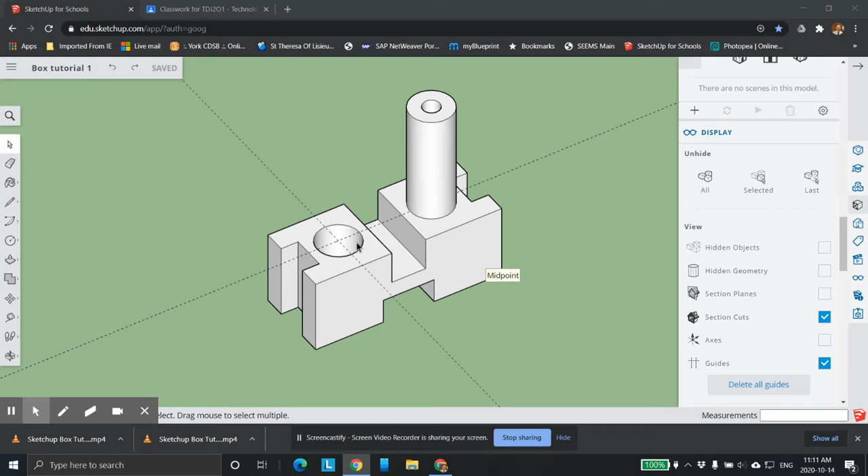This is the third video tutorial in the box tutorial series. The first one, we drew the outside and extruded. The second one, we added some features, the holes and so on, and we talked about accidentally deleting surfaces. In this video I want to come in and do some modifications, some engineering changes.

So the first thing I want to do is I'm going to fill in this hole here. Actually no, I'm not. I'm going to change the width of this tunnel. This tunnel right now is 30 millimeters wide, and I'm going to take it to 20 millimeters wide.

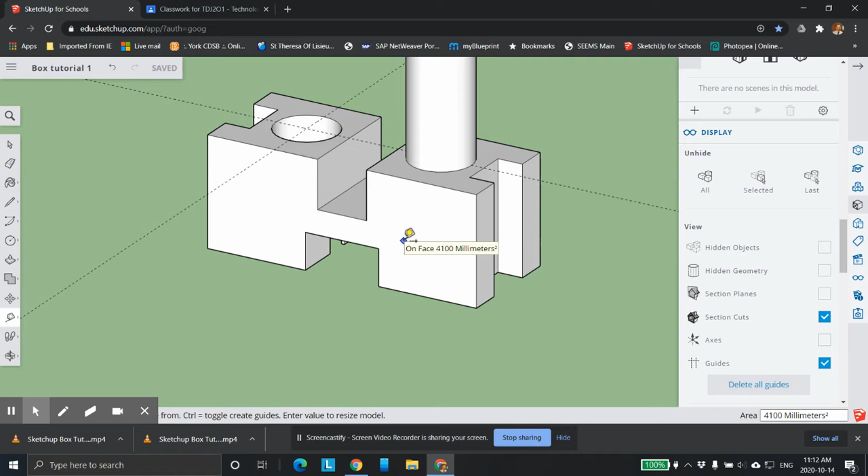The reason we're doing this is because invariably there's always changes to be made, whether it be through DV testing, design validation, something's failed and we need to make it stronger, or things are testing and they weren't working quite right. So to fill that in, we can't edit the original sketch. We can only fill it in and redo it. So that's the strategy we'll use.

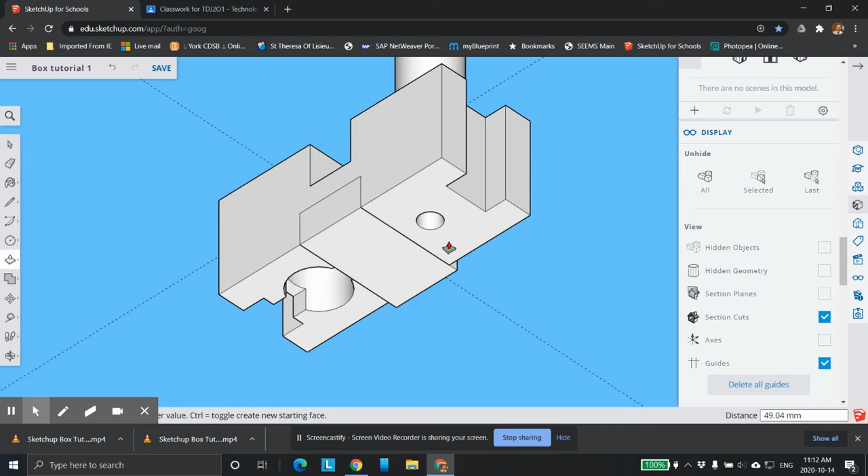We'll draw a line from here across to here. And then we can use our press pull tool like so, and we can bring it over to that edge. And now we've created a solid. Now we can come back in and delete these lines that we no longer need. This one, I'm going to leave the height the same, so I'm going to leave that, but I'm going to take this one away.

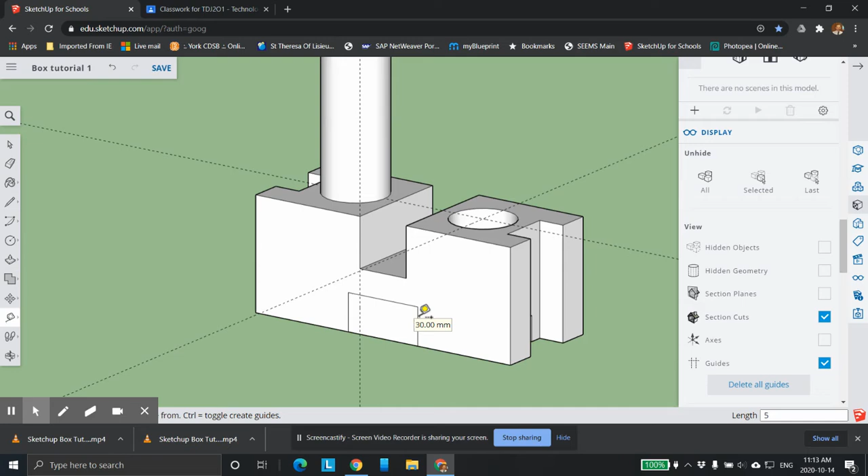Actually, no, I'm going to use that for just a second. Before we delete it, we can use it as a guide. So we can take my guides. This was 30, and we said we want to make it 20, so that's 10, so 5 in on either side. So I'm going to go in here and get 5 millimeters. And this one here, I'm going to go 5 millimeters back. Let's scroll up and make sure it's in fact sitting on that face, and it is. So now I can use my previous line as a guide.

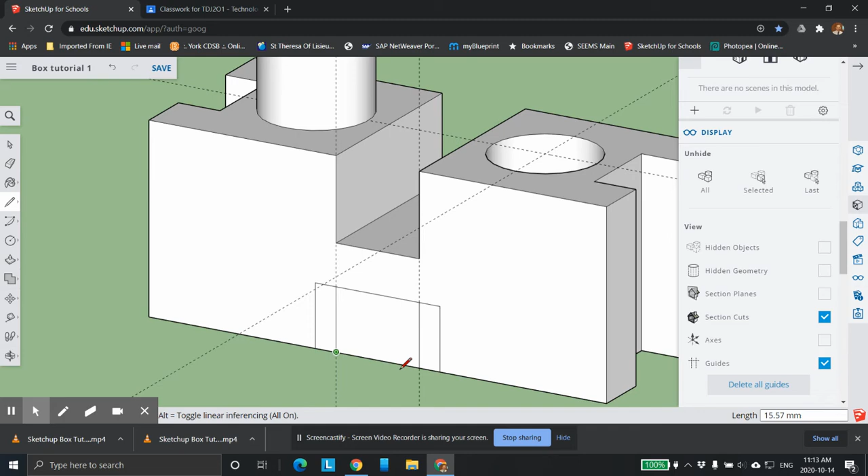So I'm going to draw from there down, and from there down, and then I'm going to close that from here back, and then I'm going to use my press pull tool here and walk it through there to that edge. Sometimes you have to carefully select it. Actually, I can probably just go here. There you go.

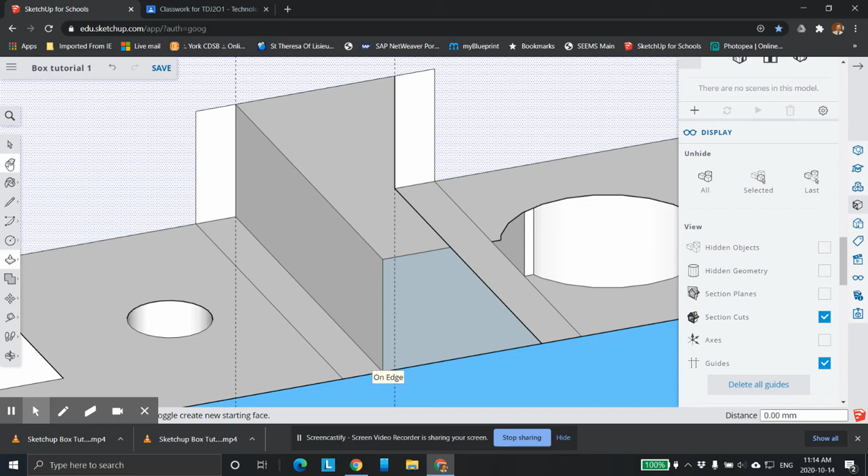Now we can delete a few things. We can delete this line here, and it'll open it up properly for us. We don't need these lines anymore because they were just our guides. I don't need the top lines either, and so on. And I can get rid of this one down here and this one across here like so, and this one. And I can do the same thing on this side over here.

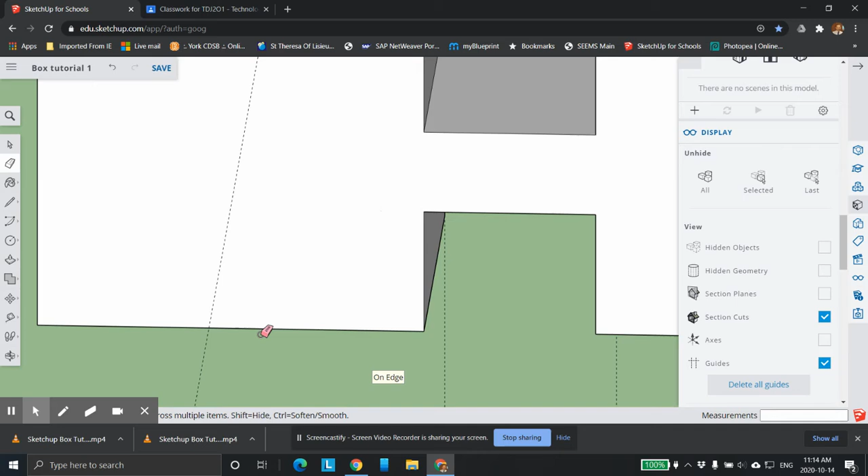Now you'll notice our channel doesn't go all the way through anymore. It ends there. So we can then finish pushing that channel back through, because we didn't want to change the channel. So I can go through with the channel to there and open it back up. And just take a quick scroll around and make sure we didn't inadvertently open up any faces.

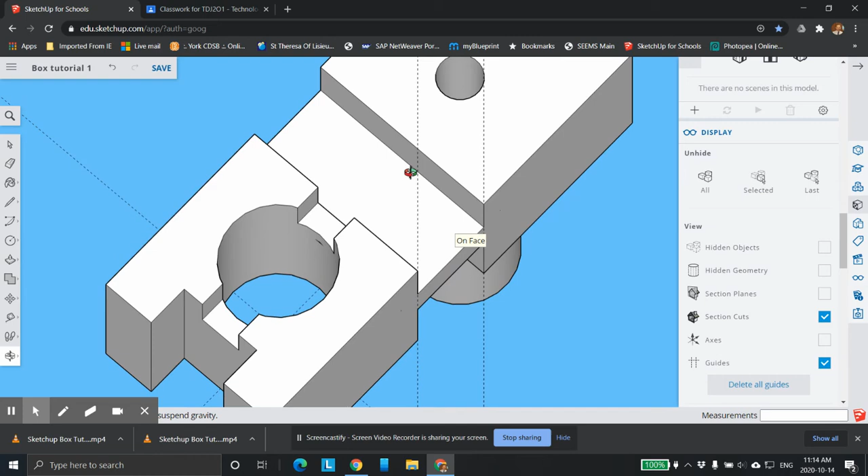We can also delete that line there. I'm pretty sure we can take that out of there and clean that up nicely. And I'm not sure what that is down there, but I can delete it too. And you can see it's nice and clean now. So we've made a modification, changed the width of that.

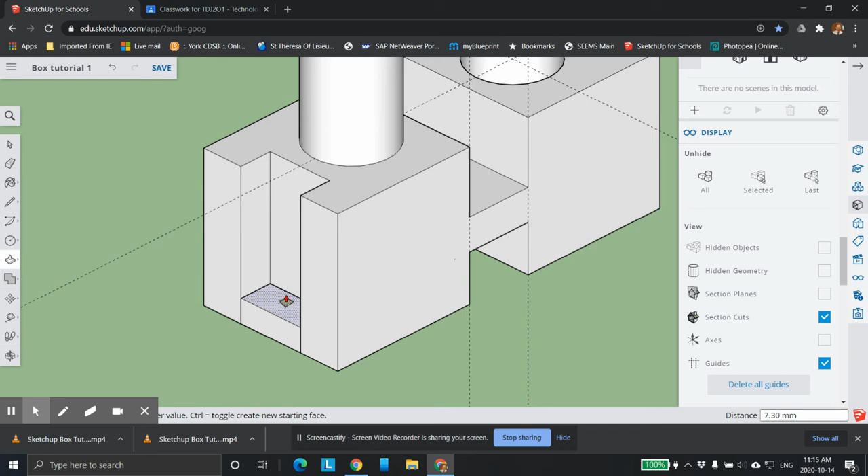We can do the same thing over here. Say, for argument's sake, we don't want that channel all the way through anymore. We find that we need it to bottom out here. We can do a couple things. We could fill it in and redrag it back down to a proper depth, or we can do this. We can just create a line, go across here like so, and then use our press pull tool and bring it up, say, 25 millimeters.

And now the channel doesn't go all the way through, and you can come in here now and delete these lines that you no longer need, and there'll be ones in the bottom as well, like so. And we've modified that.

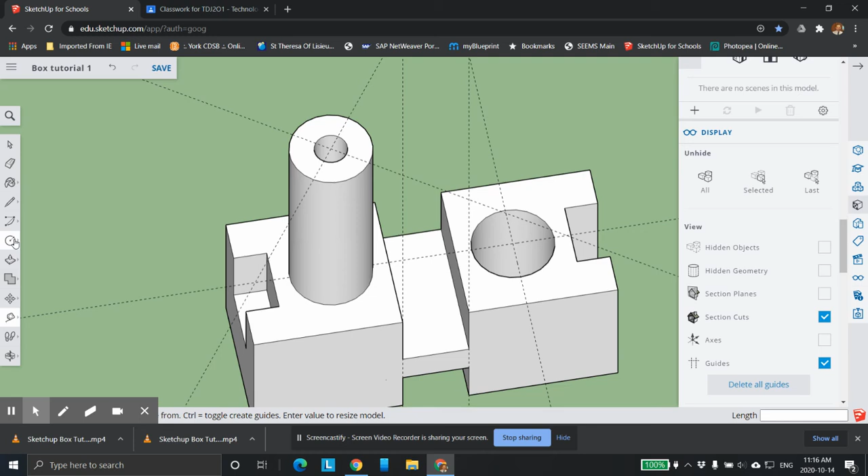Now let's say we want to change the diameter of this hole here. If we want to make it bigger, it's easy enough. We can just click there, get your center. It's not on the right surface. You can see that. So what you want to do is create some lines on your surface. So you're going to grab the proper surface, and then you can come in here and make sure we're in blue. It doesn't want to draw on that face. See if we can do it that way.

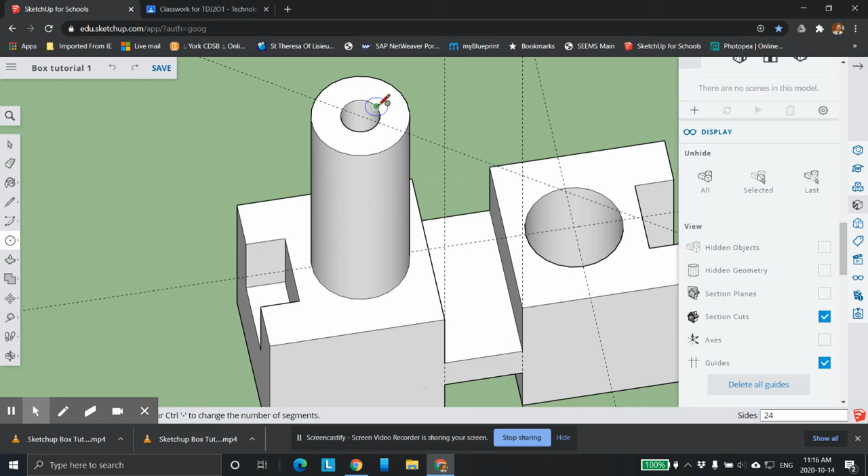Okay, so let's just fill it in. I can also delete it. The feature should be deleted all the way through. And now I can draw a larger one. So first of all, I'm going to draw a guide. I just did that because I couldn't get it to sit on the proper surface. It was giving me grief. So quicker way to do it. Now it's blue, it looks fine.

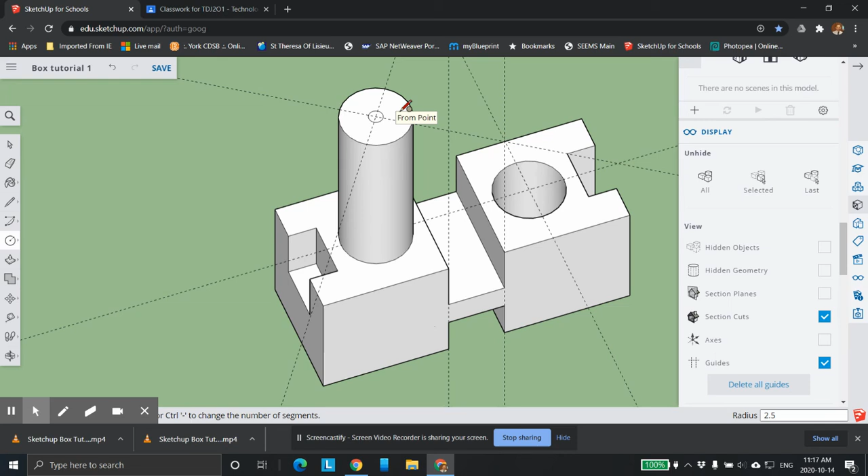2.5 millimeters, much smaller hole. Press pull tool, grab it all the way down, touch an edge, and it'll come all the way through. Okay. So that's how you make modifications. That's how you make changes to your existing drawing. It's a little bit more complicated, but it's still doable. Okay.